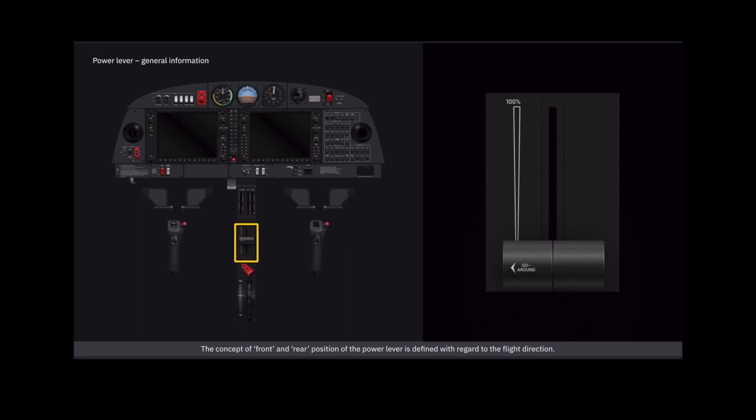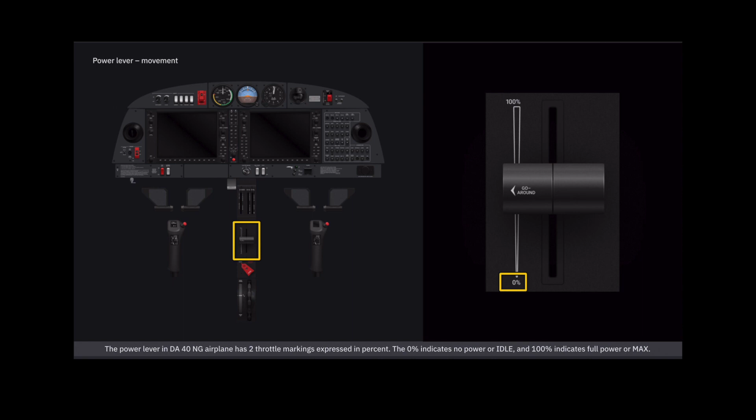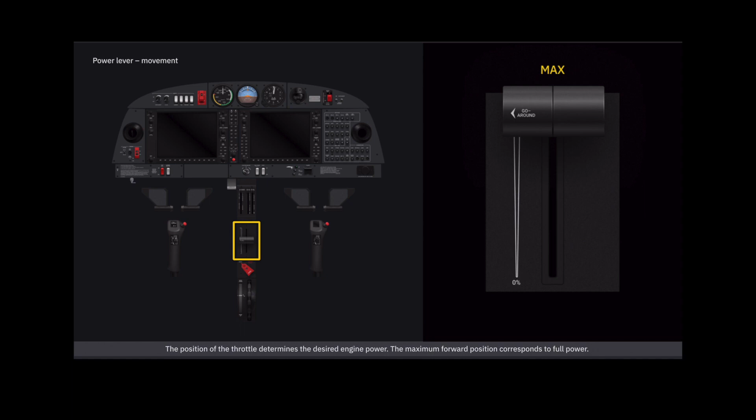The power lever in the DA40NG airplane has two throttle markings expressed in percent. The 0% indicates no power or idle, and 100% indicates full power or max. The position of the throttle determines the desired engine power. The maximum forward position corresponds to full power. The maximum rearward position corresponds to idle power.

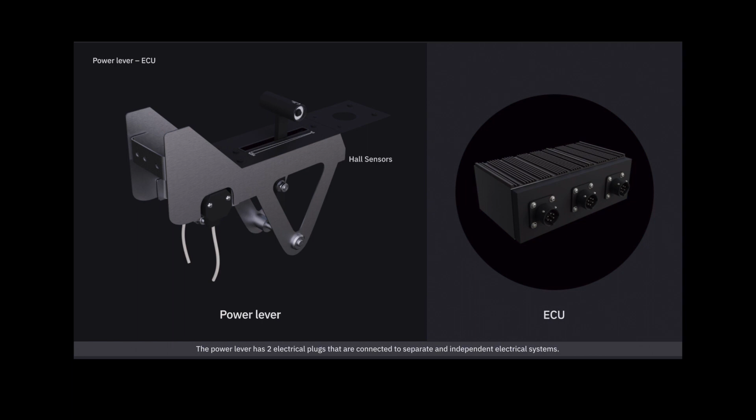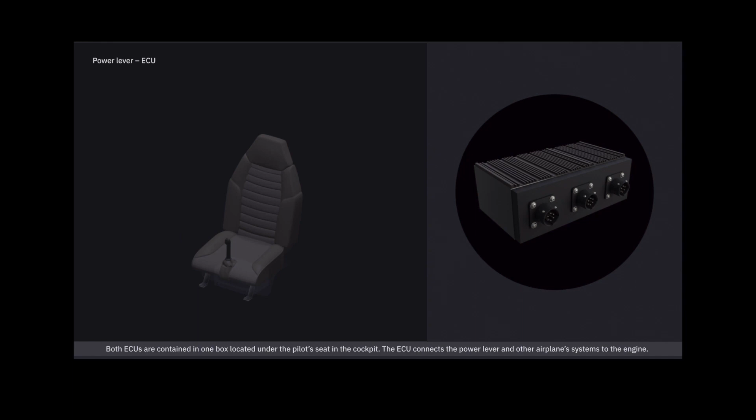The power lever has two electrical plugs connected to separate and independent electrical systems. The electrical cables connect the power lever to the engine control system. One cable provides signals to the engine control unit A, while the other supplies engine control unit B. Both ECUs are contained in one box, located under the pilot's seat in the cockpit. The ECU connects the power lever and other airplane systems to the engine.

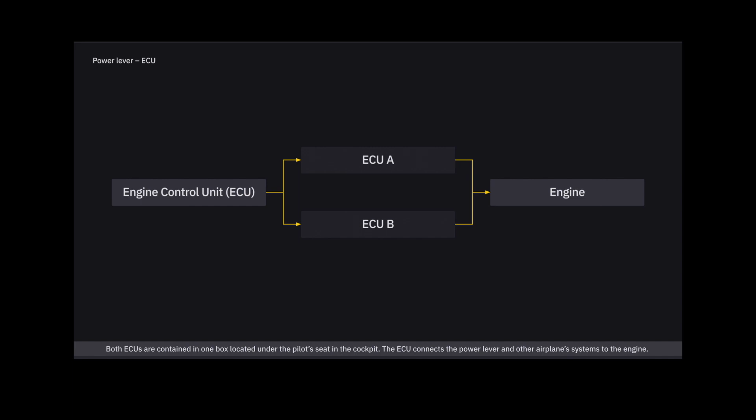As the power lever is set to the desired position, the ECU controls the manifold pressure, injected fuel quantity, and the propeller speed. These controls are necessary to achieve the preselected engine power.

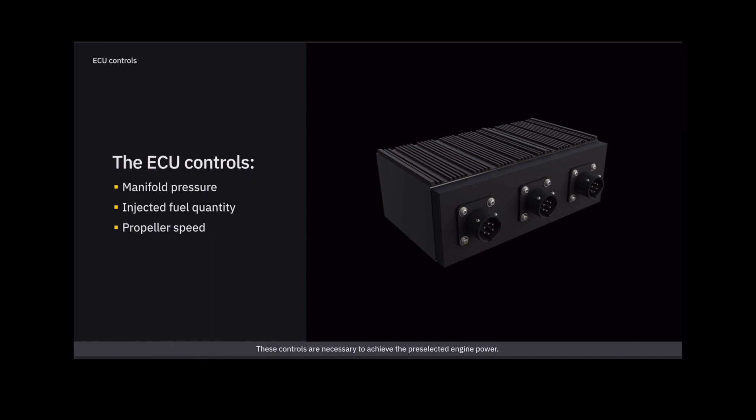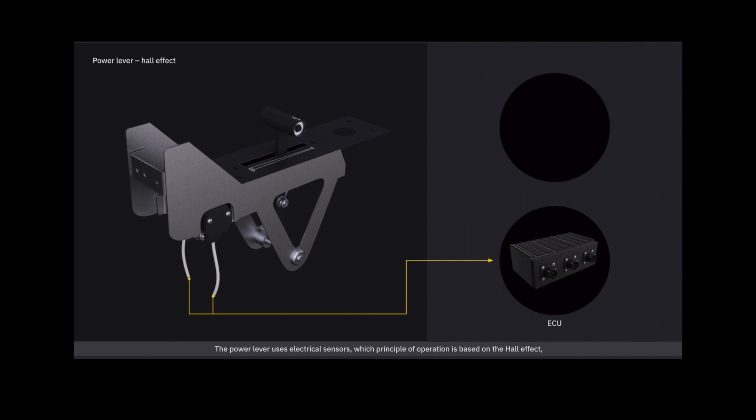The power lever is connected to the Hall sensors by means of a push rod. The power lever uses electrical sensors, which principle of operation is based on the Hall effect, to supply the ECU with signals in proportion to the position of the power lever. The engine control system uses these signals to set the power output, and to control the propeller governor, to achieve the best RPM for the power setting.

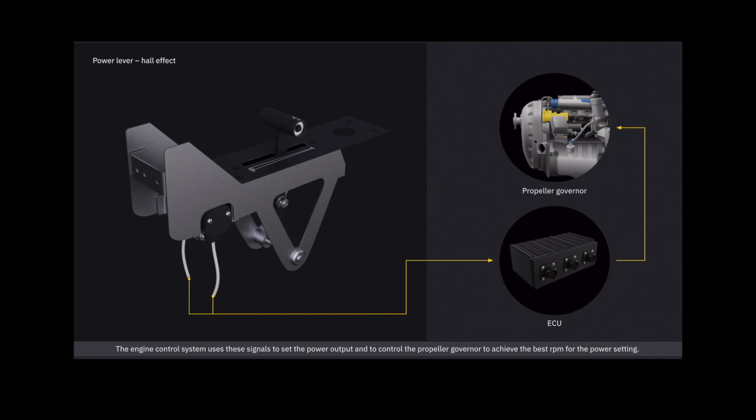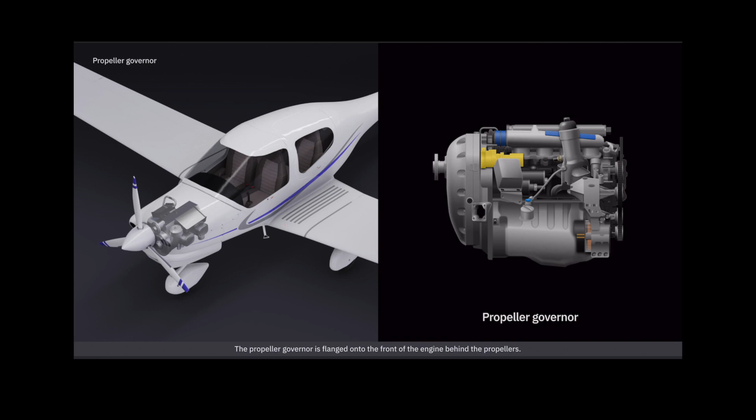The engine has an electronic engine control unit, also known as ECU, which controls the propeller pitch angle hydraulically via the propeller governor. The propeller governor is flanged onto the front of the engine behind the propeller. It adjusts the propeller pitch automatically via an electromechanical actuator, to achieve the required RPM of the airplane.

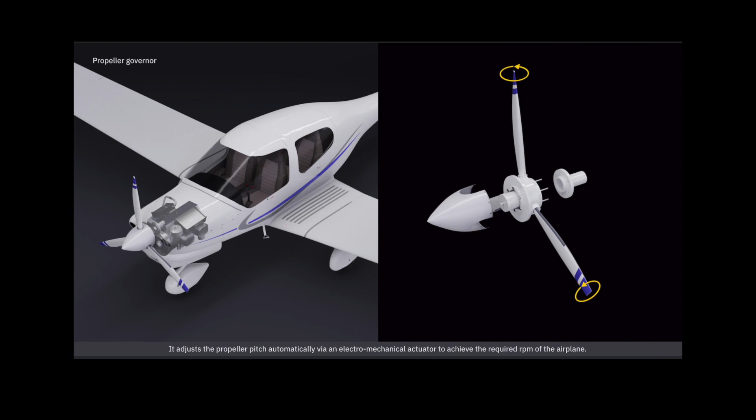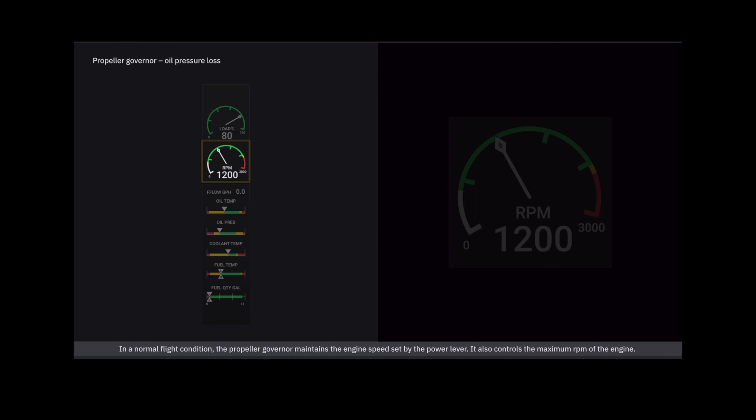In a normal flight condition, the propeller governor maintains the engine speed set by the power lever. It also controls the maximum RPM of the engine. In the case of oil pressure loss in the propeller governor, the blades go to low pitch, known as fine pitch. This automatic adjustment produces maximum static RPM.

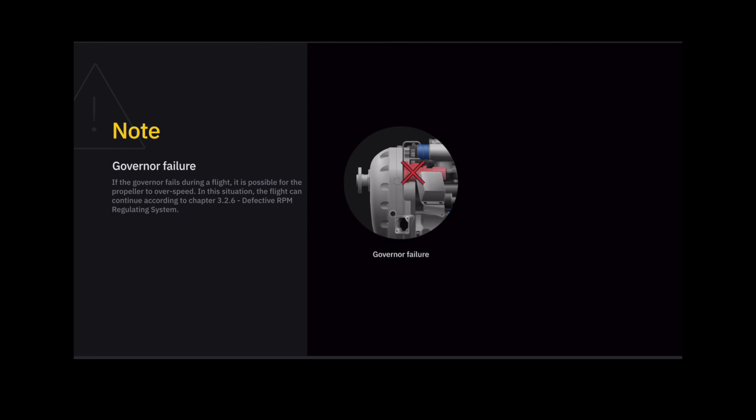Note: if the governor fails during a flight, it is possible for the propeller to overspeed. In this situation, the flight can continue according to Chapter 3.2.6, Defective RPM Regulating System.

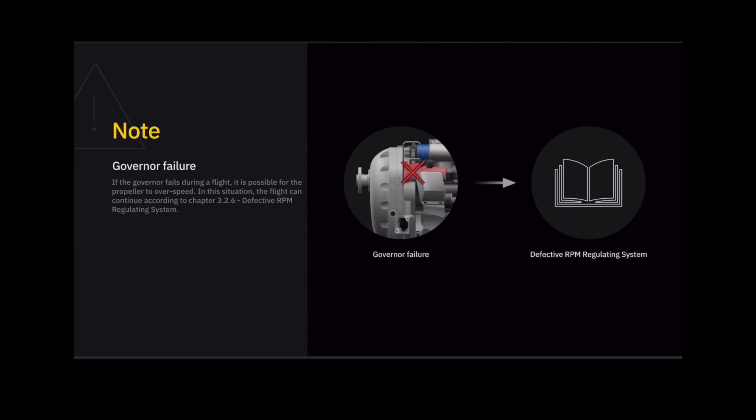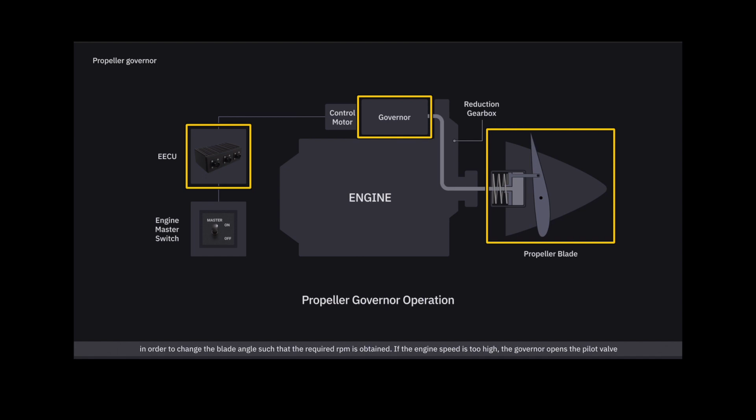The ECU measures the engine performance and sets the governor to regulate the flow of oil pressure to the propeller, in order to change the blade angle such that the required RPM is obtained. If the engine speed is too high, the governor opens the pilot valve, so the oil flows into the propeller hub, causing an increase in propeller pitch and a reduction in RPM.

If the engine speed is too low, the governor releases oil flow out of the propeller hub. The piston moves aft, reducing the blade angle, causing an increase in engine RPM.

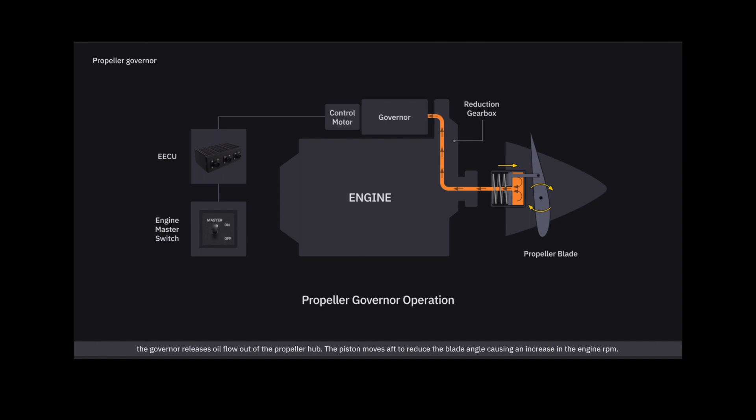Caution: following governor failure, the RPM should be adjusted using the power lever. Every effort should be made not to exceed 2,500 revolutions per minute.

Caution: the power lever should be moved slowly, in order to avoid overspeeding and excessively rapid RPM changes. The light wooden propeller blades produce more rapid RPM changes than metal blades.

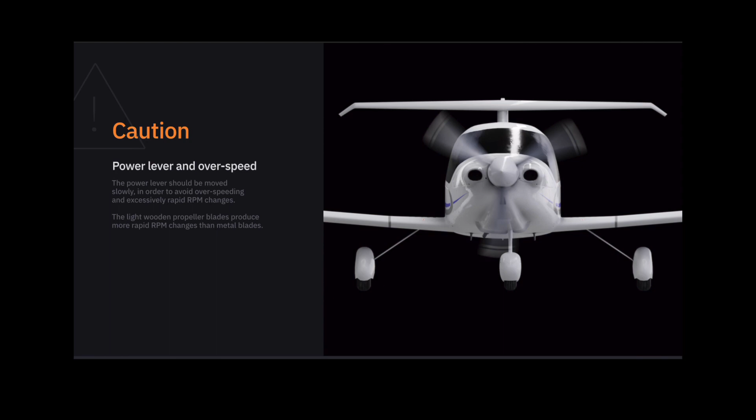Warning: the propeller blades may remain in the position of the highest pitch, in case of a malfunction of the ECU. In this case, the reduced engine performance should be taken into consideration.

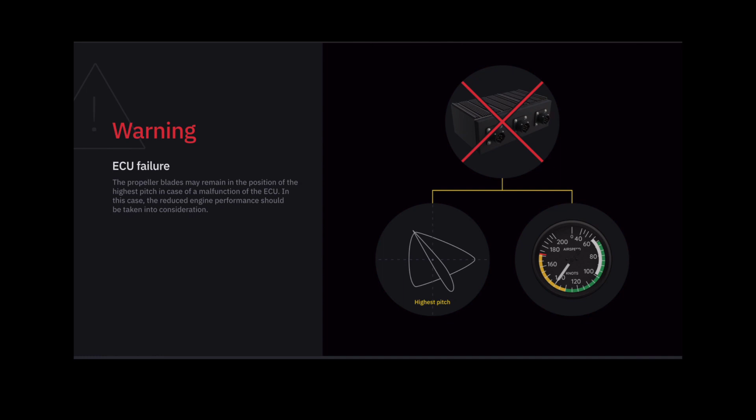Electric master and engine master. The electric master and engine master are responsible for starting the engine of the airplane. The electric master is a key switch, located on the bottom of the instrument panel, next to the fuel transfer switch. The engine master is a switch, located on the left instrument panel, below the left ventilation nozzle.

The electric master is operated by a key that can be rotated into 3 positions. When the key is in the off position, the battery power is disconnected. When the key is set to the on position, the battery power is connected to the power distribution system. Positioning the key to start enables starting the engine.

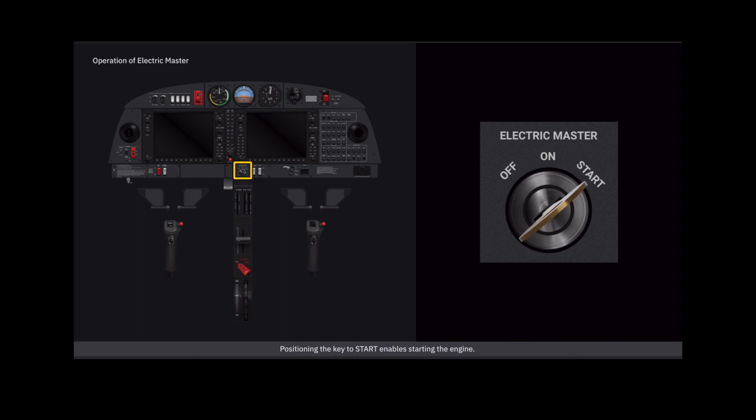For the engine to start, the key must be turned clockwise, against the spring, to the start position. The force applied to the key must be released when the engine starts, so the spring can return the key from the start position to the on position.

For the engine to start, the engine master switch must be set to on. The engine starter cannot operate without the engine master switch set to on, even if the electric master key switch is set to start. For the engine to shut down, the engine master switch is set to off.

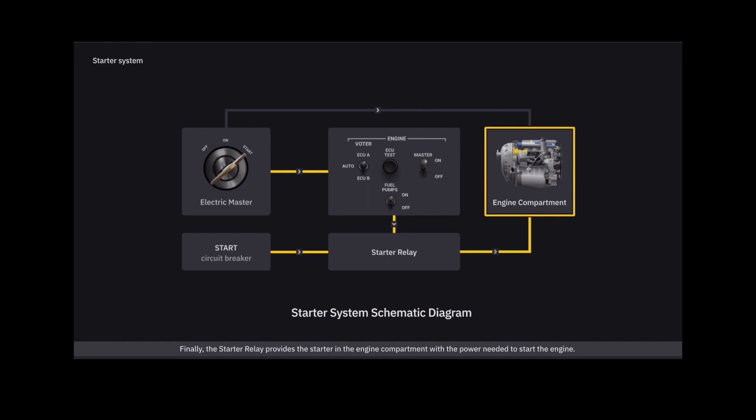The starter system has a high-powered electric starter that operates through a circuit of DC power supply. The current starts flowing from the electric master to the engine master, then to the starter relay. A start circuit breaker located in the main bus is also connected to the starter relay. Finally, the starter relay provides the starter in the engine compartment with the power needed to start the engine.

When the engine is started, the electric master supplies the battery in the engine compartment.

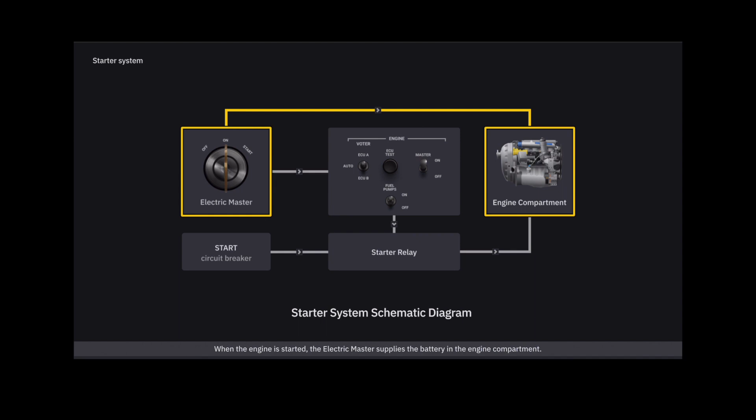Engine control unit voter.

The ECU voter switch is an instrument used to control the operation of the engine, which enables selecting between 2 ECUs. The ECU voter is located on the left side of the instrument panel in the engine section and can be toggled between 3 positions: ECU A, Auto, and ECU B.

The engine can be controlled either by ECU A or ECU B. However, for all normal operations, the ECU voter switch is set to auto for the automatic selection of appropriate ECU control.

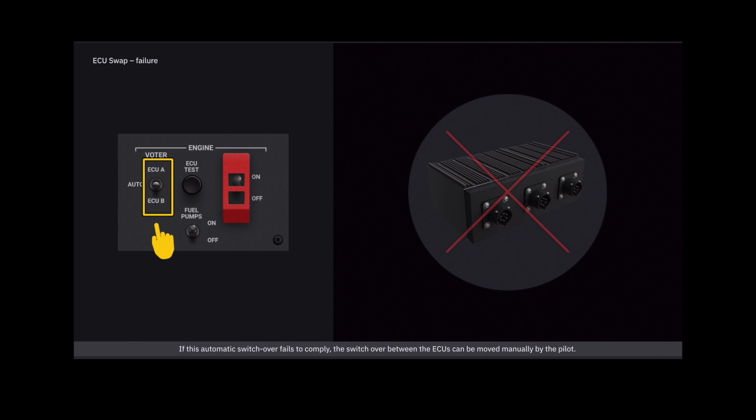If the active ECU fails, the ECU voter switches automatically to the other ECU, giving it authority to control the engine. The failed ECU is indicated in the annunciation window and presented as ECU A fail or ECU B fail. If this automatic switchover fails to comply, the switchover between the ECUs can be moved manually by the pilot. This procedure must only be considered in an emergency.

Engine control unit test button.

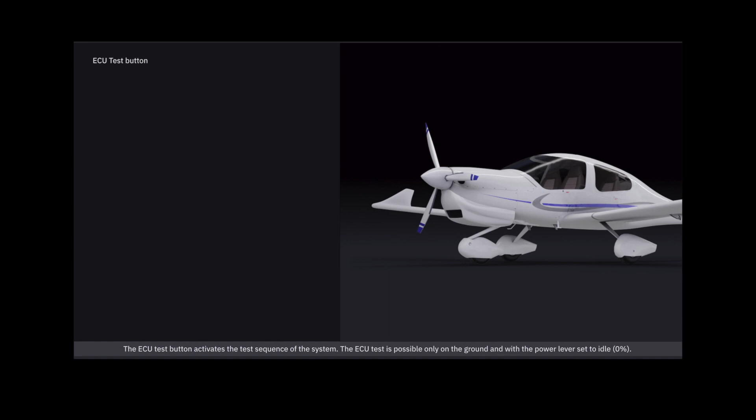The ECU test button is located on the left side of the instrument panel, between the ECU voter and the engine master switches. The ECU test button activates the test sequence of the system. The ECU test is possible only on the ground, and with the power lever set to idle, 0%.

If the ECU voter switch is not in the auto position, the ECU test will not start. The self-test of the ECU starts by pushing and holding the ECU test button throughout the whole procedure.

The ECU switches from ECU A to ECU B, or from ECU B to ECU A, whichever is active at the moment. The ECU keeps monitoring the propeller RPM automatically throughout the process. Finally, the ECU performs a switchover to the initial active ECU.

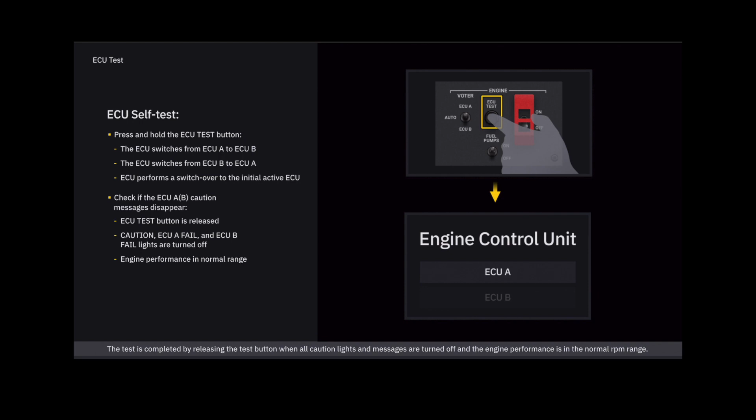The test is completed by releasing the test button when all caution lights and messages are turned off and the engine performance is in the normal RPM range. Note: during the ECU self-test, caution ECU A fail and ECU B fail are illuminated during the whole procedure.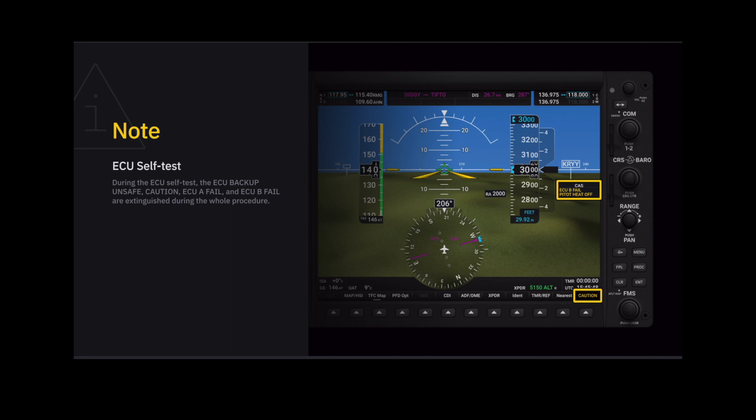Caution. A slight shake of the engine may occur when switching from one ECU to the other.

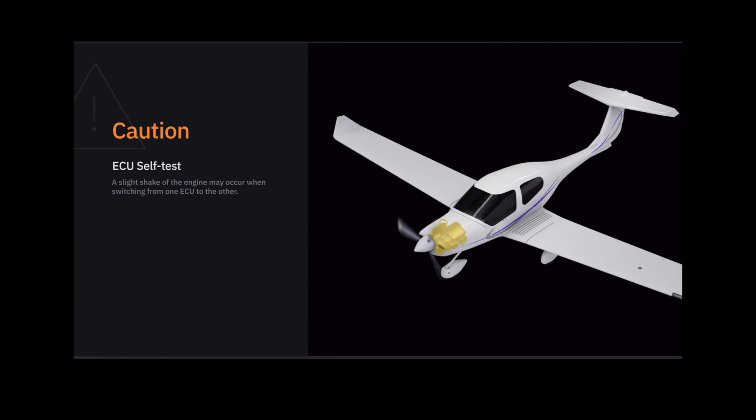Caution, ECU test failure. If the ECU A and/or ECU B fail indicators do not illuminate during the test sequence, there is a malfunction in the engine control system. Terminate flight preparation. The ECU test procedure must be completed without any error.

ECU A and/or ECU B fail should extinguish after test completion. In case the test procedure aborts with an error indication, ECU A fail, ECU B fail, or both indicators remain on, terminate flight preparation, even if the engine seems to run smoothly after the test procedure.

Caution, parking brake during the ECU test. During the test sequence, the engine will produce thrust. Therefore, the parking brake must be set.

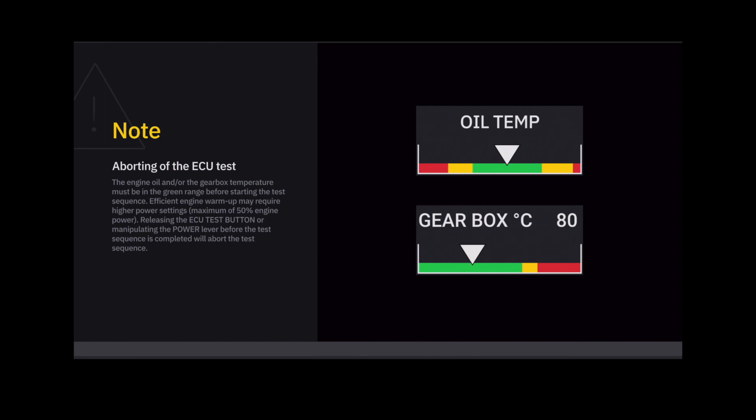Note, aborting of the ECU test. The engine oil and/or the gearbox temperature must be in the green range before starting the test sequence. Efficient engine warm-up may require higher power settings, maximum of 50% engine power.

Releasing the ECU test button or manipulating the power lever before the test sequence is completed will abort the test sequence.

Caution, engine temperature. Running the engine with the VOTER switch on ECU A or ECU B, other than for the ECU test or in case of emergency, is prohibited. The engine control system redundancy is only given with the VOTER switch set to auto.

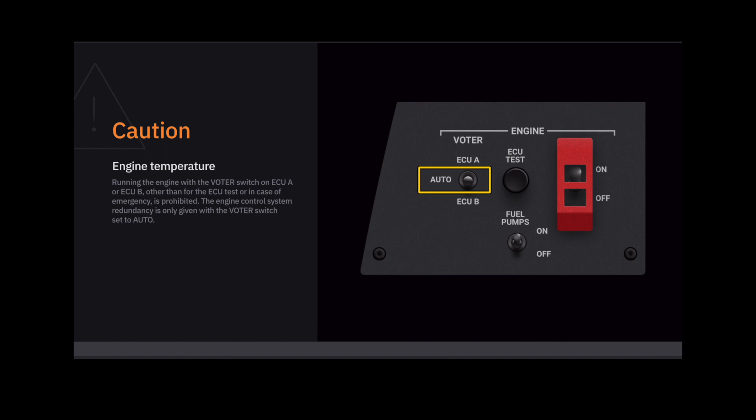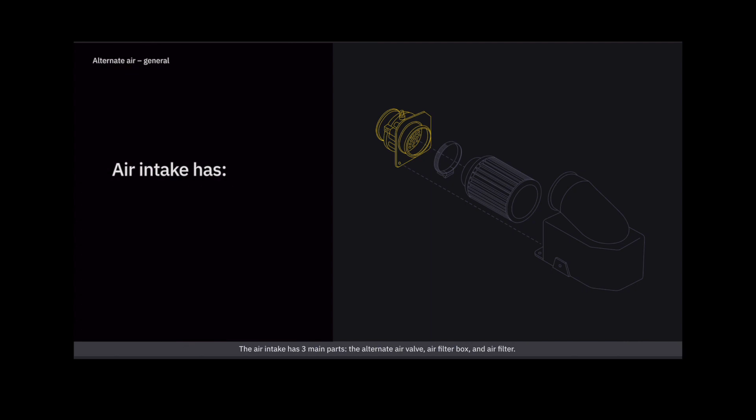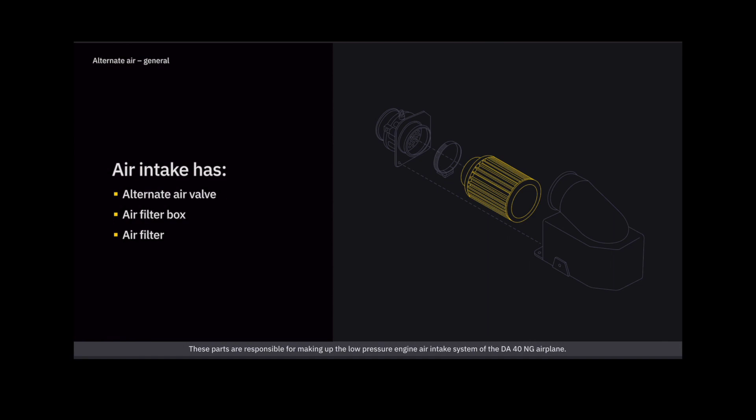The air intake has three main parts: the alternate air valve, air filter box, and air filter. These parts are responsible for making up the low-pressure engine air intake system of the DA-40NG airplane. A lever located on the left side of the center console under the instrument panel operates the alternate air valve.

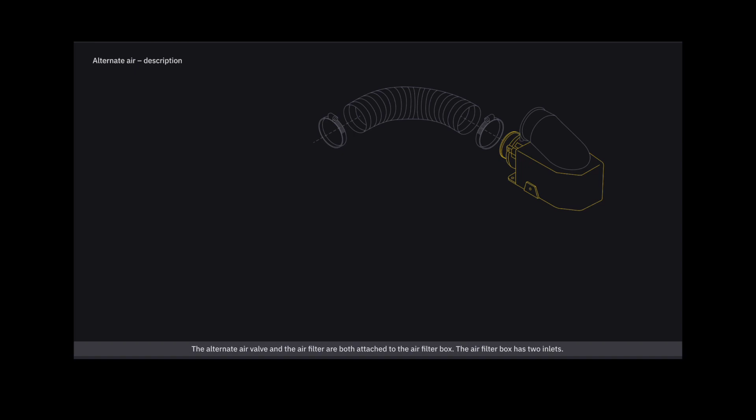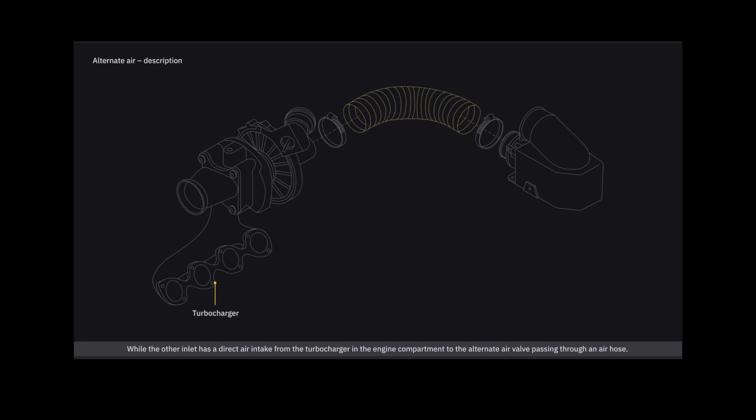The alternate air valve and the air filter are both attached to the air filter box. The air filter box has two inlets. One inlet is connected to the air intake duct via a flexible hose, while the other inlet has a direct air intake from the turbocharger in the engine compartment, to the alternate air valve passing through an air hose.

The alternate air lever is connected to the alternate air valve using a Bowden cable to allow air supply from the engine compartment once the lever is activated.

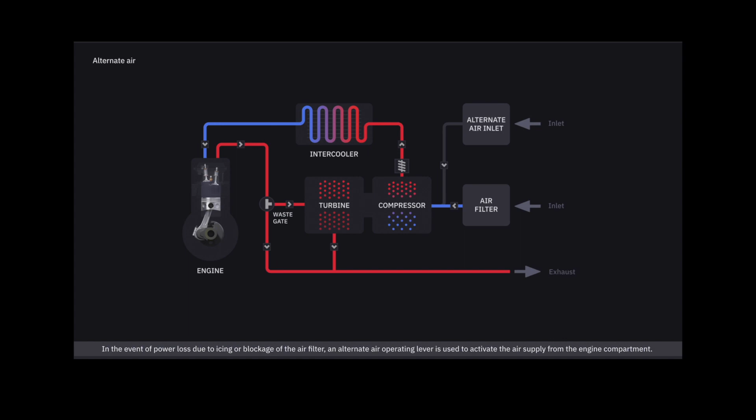In the event of power loss due to icing or blockage of the air filter, an alternate air operating lever is used to activate the air supply from the engine compartment.

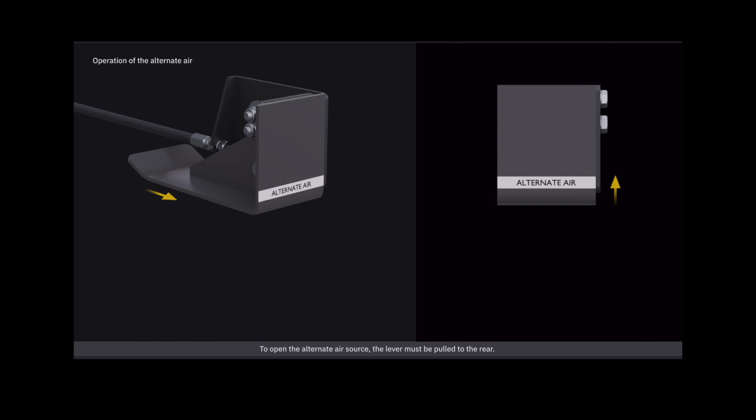In normal operation, the alternate air control lever is set to the off position, represented by the alternate air placard on the lever. To open the alternate air source, the lever must be pulled to the rear. The alternate air on placard is visible on the lever when it is in the rearward position.

Summary. With this section, you got familiar with power lever, electric master and engine master, engine control unit VOTER, engine control unit test button, and alternate air.